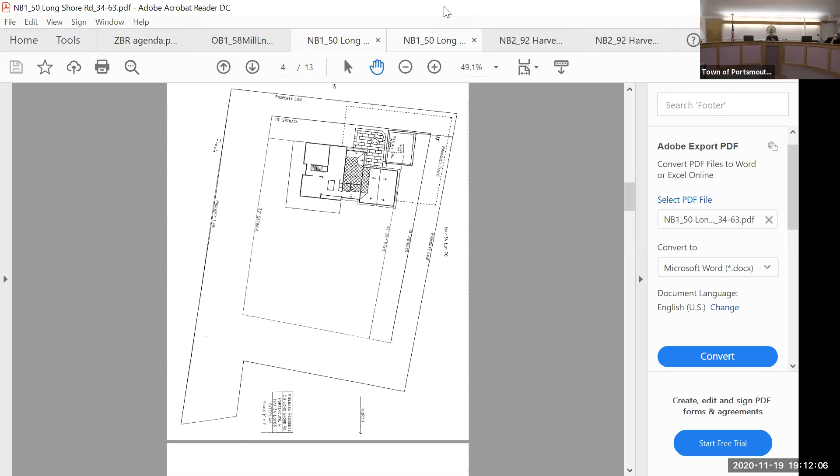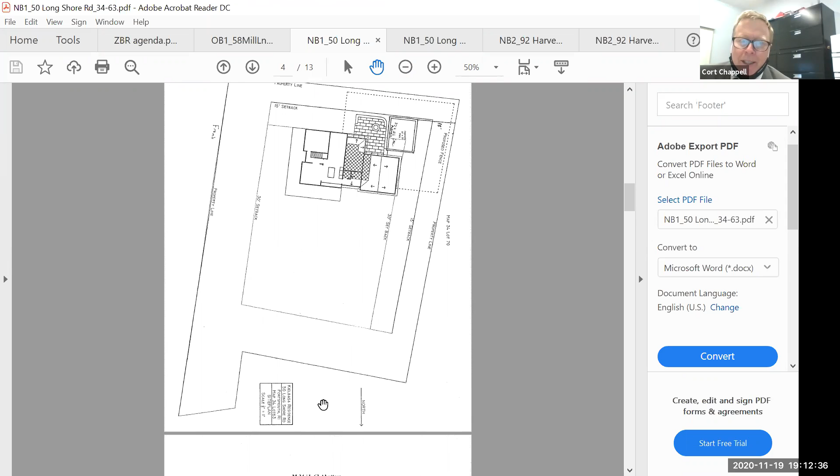I'd like to begin by explaining the picture in front of you. First, north is down in that picture as we speak right now. That line on the north side is Mark Lane. So because that is Mark Lane, there is a 30-foot front yard setback.

On the east side is Longshore Road. Longshore Road is Mr. Kielbasa's address and is also a front yard. So it's one of those situations where we have two front yards.

If you look at the property that Mr. Kielbasa did not build but purchased, you'll see that the house is set back way into what I'll refer to as the southwest corner, and there's a patio and things that are already on the line. What we did was draw the setbacks for you of the double 30 feet. And then, because the front door is on Longshore and the address is Longshore, and we only have one rear yard, I designated the west as a rear yard.

The pool that is being proposed is tucked in as close to the patio as we can get it, and there is 18 feet from the property line where 30 feet is required. That's why we're here tonight asking for a 12-foot rear yard setback.

There are no problems with the front yard setback either to the north or the front-back setback to the west. There's no problem with the side yard setback to the east because the pool maintains the 15-foot setback. It's just that the pool cannot go in the front yards by statute, by ordinance. It's the only place we can put it.

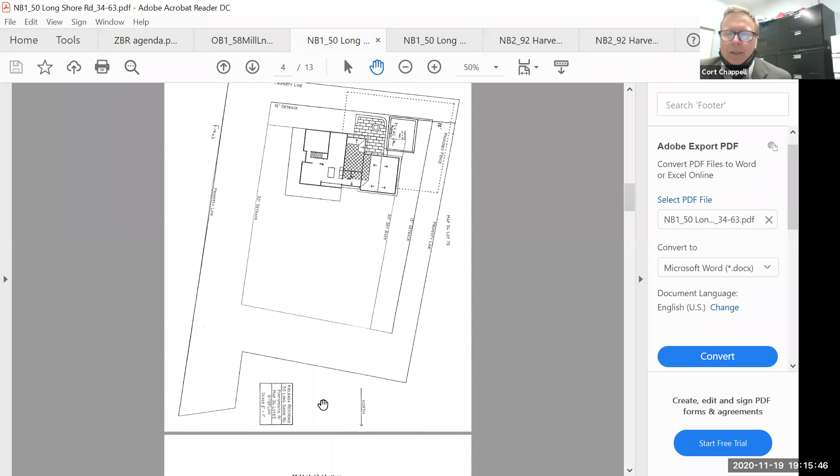I sent to Mike and asked him to put up as an exhibit a letter from Mark and Paula, who own the property immediately to the west. They have reviewed the petition, are in full support, and are in favor of you granting this petition.

If you've had the opportunity to go down there, there is a heavy vegetated line on the west side. So it's fairly easy for Mark and Paula to say they won't see this because of the very mature growth holly trees. And if you've been down there, you'd also notice that the neighbors to the south have a heavy, thick, dense row of pine trees, although it's on their side of the wall. So it's very protected by vegetation on the sides that are affected.

Unless there are any questions of Mr. Kielbasa directly, I think that's the sum and substance of the petition. Thank you. And there are no requests for any variances on the height of fences.

Thank you, Mr. Chappell. I'm looking at a satellite view of it myself right now. One must question why they wanted the house that far back on the property — I think that may be a springy or wet area. If you look at the Google satellite or street view, you'll see the whole thing is kind of elevated, like they put in a system and built the lot up higher. The topography is interesting — it goes uphill from Longshore, and the front yard is flat, but there's a large system out there.

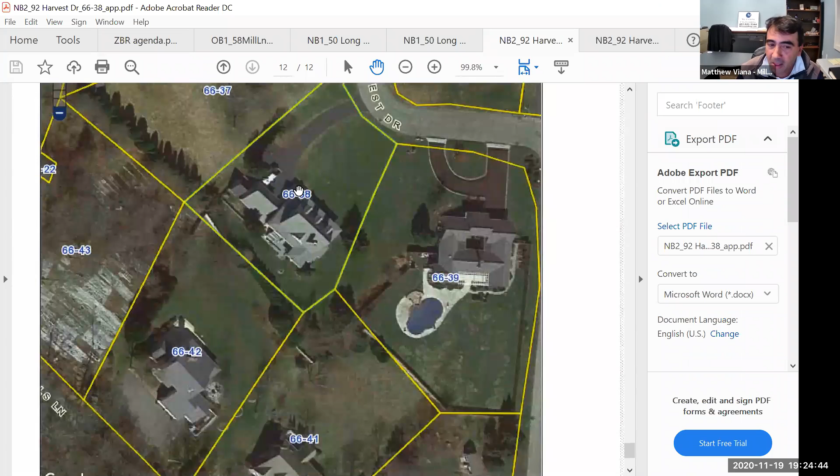This application is very similar to the one you just heard from Mr. Kielbasa and Mr. Chappell. It's an existing home. The Harmons bought it about 3 years ago. They've renovated the inside and the outside. It's their family home, a 3-bedroom, single-family property on Harvest Drive.

This house, similar to the last applicant, was set back toward the rear setback quite a bit, with the septic system located in the front of the property, minimizing the area behind the home where the pool is proposed, requiring the same type of variance. It's simply a rear setback of 15 feet to the pool where 30 feet is required.

And they did not build the property. It's not through any fault of their own. It's the irregular location of the home set so far back to the rear of the property. There's a thick vegetative buffer, as you can see on the plan, about a 10-foot wide evergreen hedge all across the area where the pool is proposed.

There's fencing around the rear of the property. I believe they need to add a little more to close it, but that's certainly something they will do before applying for their building permit.

I can walk through the requirements for the variance process. It's not a result of any prior action of the applicant, as they bought the property this way. It is a unique character of the property where the home is set back so far.

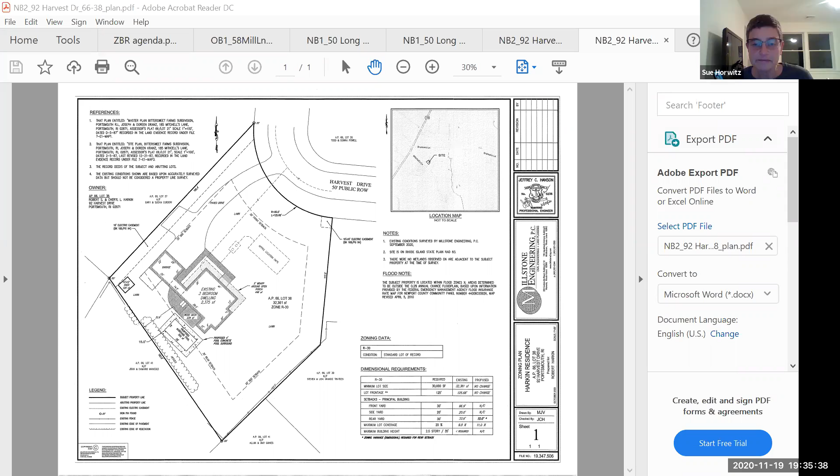Okay, now is Ms. Horwitz on? I'm here, I'm here. Thank you, yay. Sue, good to see you, Sue. How are you? Sorry, I couldn't. That's okay, welcome. Okay, thank you.

So we'll now be hearing the petition of Michael and Karen Mulligan of 58 Mill Lane. Mr. Borden has a conflict on this, so it will be Mr. Furell, Ms. Pavlakis, Ms. Horwitz, Mr. Ladika, and myself hearing this petition. So are the Mulligans on?

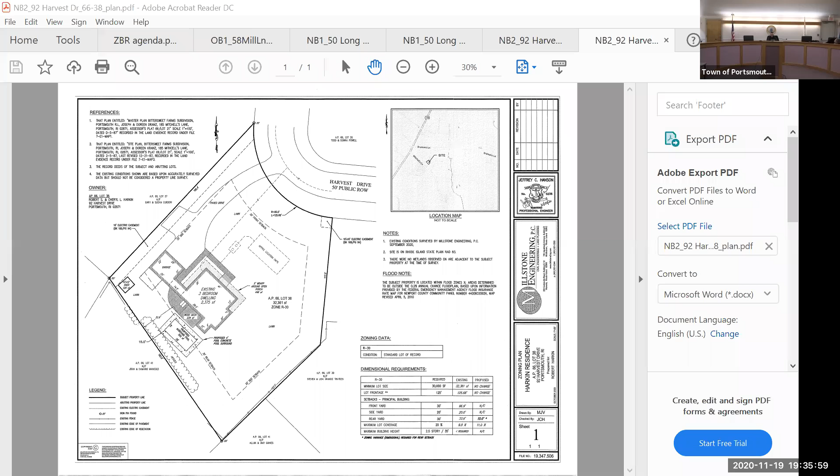You have someone with their hand up now. Does Paul? Put your hand. Is Michael or Karen Mulligan on? Yes, we are. Oh, you are, very good.

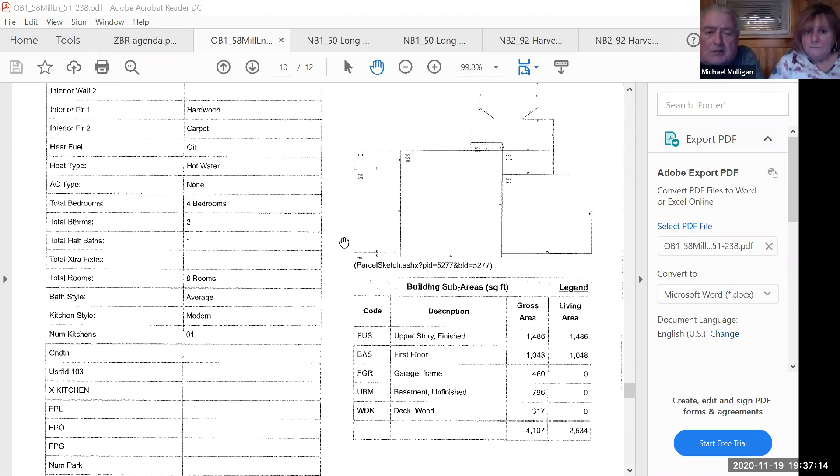Okay, would you like to walk us through why you're here? We had purchased an 8x8 shed that we placed on our property at 58 Mill Lane in a spot we thought was fine, because when our house was originally built, we were on Vieira Road. Sometime later, the town decided they weren't going to approve Vieira Road for use, so we were asked to take Mill Lane by the fire department. Well, we had no choice, so we had to switch to Mill Lane. So basically our frontage is Vieira Road, our side yard happens to be Mill Lane.

Right, and so we placed it on—I'm looking at an aerial shot of this—and your door faces Vieira Road, correct? Correct. Your driveway is off of Vieira Road, correct? Yes. But other than your garage, which points at Mill Lane, you can't access it from Mill Lane. No, we can't. Got it.

So basically, you want, or have put your shed in what you consider the rear of your property, which is that portion of your house behind your front door, correct? No, it's placed basically across from the garage, the opening of the garage, in the side yard, which is Mill Lane. Yes, correct, which the town says is your address. Got it, yes.

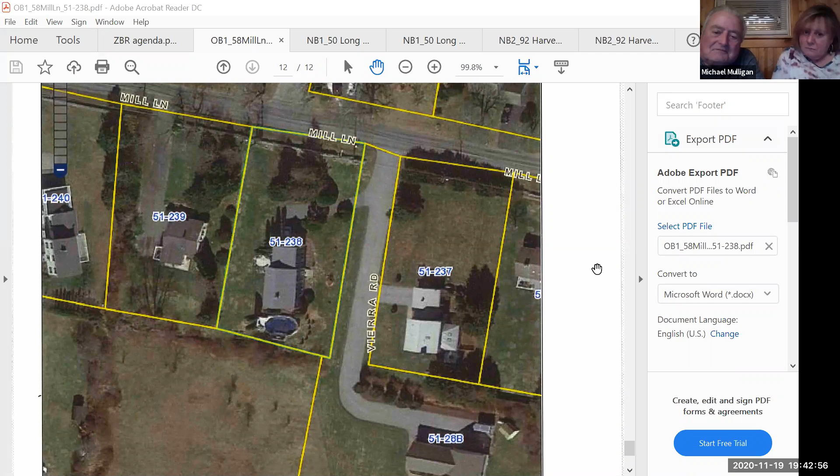There are no letters in the file, but I will ask for any abutters or interested parties who want to speak on this. Do we have anyone, Mike? I don't believe there were any on that I talked to before calling.

So we'll vote now. Michael and Karen Mulligan of 58 Mill Lane, Portsmouth, Rhode Island, before this board, tax assessor's map 51 lot 238, requesting to place their shed in what the town has considered their front yard. The shed meets all other setback requirements, other than the fact that it's being placed in their front yard, although for the record their address was changed by the town - the house was not moved. The door faces Vierra Road, which was their original address.

So, Mr. Furell, do you want to take a shot at this? Yes, sir. Mr. Chairman, I vote to approve the variance allowing the shed to be placed in the applicant's front yard, given the unique nature of the property and the unique designation by the town of their front yard, which is in no way the responsibility of the applicants. I believe it's a reasonable place to put a permitted accessory use, and to deny this would be more than a mere inconvenience. Thank you.

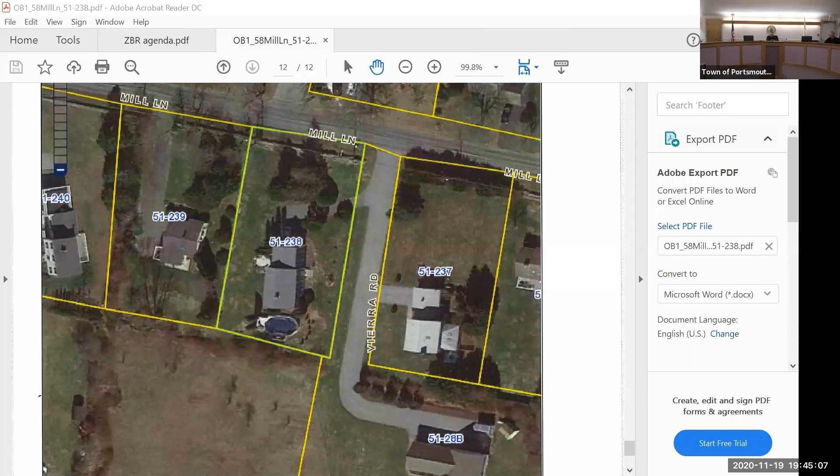Chairman votes to approve for reasons previously stated by Mr. Furell. This certainly was not a hardship created by the applicant. The applicant's hardship was created by the town for no other purpose than to tell them their street was no longer what it was. So again, to deny amounts to more than a mere inconvenience. So it has been approved.

To be honest with you, Mulligans, you should never, in my opinion, have had to come to this board for this. But for the record, it's been approved, and you don't have to worry about it from here on out. Thank you. All right, have a good evening. Have a good Thanksgiving. You too.

Okay, next item on the agenda is by Marianne Dornfield, applicant, and Rick Realty LLC. Now let me get all my paperwork here. They are seeking a dimensional variance under Article 3, Section D2. The parcel, according to their grounds for variance, is a non-conforming parcel that does not front on a public street and currently contains a single-family unit. The variance is being requested to construct a multifamily duplex on the existing non-conforming lot.

So, it is Ms. Dornfield and Rick Realty. She is, and also John McCoy is the attorney who's going to be representing her. All right, so does Mr. McCoy want to start?

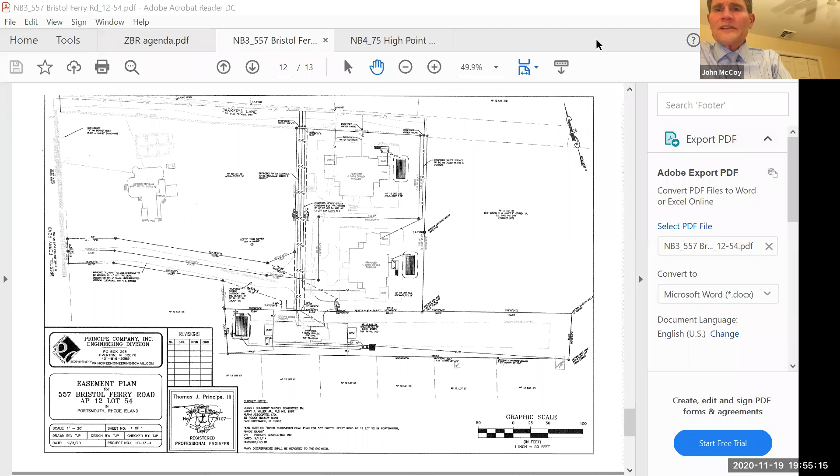Mr. McCoy, before I go around to the other board members for questions, is there anything else you'd like to add? I don't think so, Mr. Chairman, I think I laid it out. I think you summed it up quite well. It is a lot of record, and this is really the least relief necessary to get access to Bristol Ferry Road so this duplex can be constructed. No other variances are being sought, as you correctly noted.

Right, okay, thank you. Mr. Furell, do you have any questions? No, sir, no questions. Okay, Ms. Poplakis, do you have any? No, I do not. Okay, Ms. Horowitz, do you have any? No, I don't. The chairman doesn't have any either.

I will ask, let me see if there's any letters in the file for or against, and I don't see any. However, I do believe there may be a caller. Yeah, I think we have two people with their hands raised.

We'll go with Paul. Paul, if you could unmute yourself and give your name and address, please. Yeah, my name is Paul Ganberger. I'm at 48 Windward Drive, and my property abuts the property in question.

I too subscribe to what Mr. Borden said earlier about his ownership of the property, and when he approached the board a number of years ago to subdivide the property, I expressed some concern at that time, and I have the same concern now about placing this dwelling right where it is.

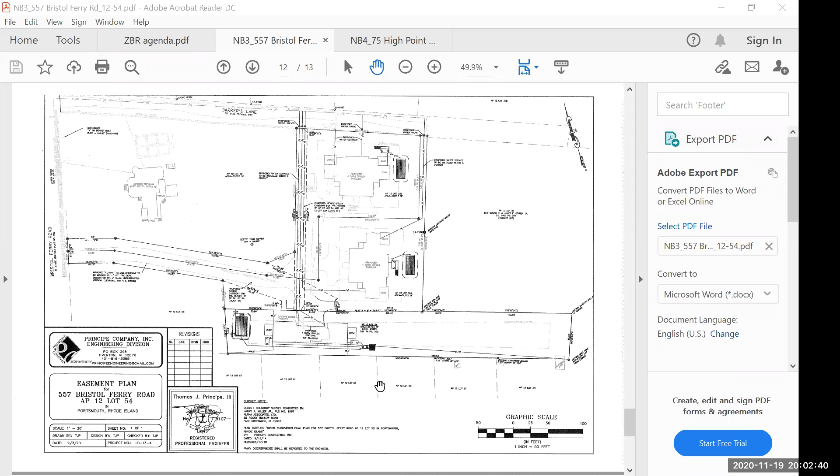Okay, all right, that's it. Thank you. All right, do we have somebody else, Mr. Scholler?

Yes, so right now we're going to have Lisa Rigo—oh actually, sorry, no, this is Dorothy O'Brien. Okay, go ahead, Ms. O'Brien, you on? Hi, I'm having a hard time hearing, but I'm here. Could you give your full name and address for us please? Dorothy O'Brien at 99 Linda Ave. Okay, go ahead, Ms. O'Brien.

My concern is the water drainage, and the fact that that property is higher than my property is, and I've had issues in the past with water drainage and my yard flooding. So with those houses being built, it's a major concern for me with the water drainage and the septic, and that would be coming into my yard basically.

Okay, so you're aware this is not the 2 4-bedroom duplexes—in fact I'm looking at Principe Engineering, and I see Susan P. and James O'Brien, there was a vacant lot that kind of runs that way behind those two. It's not those 2 lots we're talking about, so you do understand that, correct? I do now. I was understanding it was the property that was on Murphy.

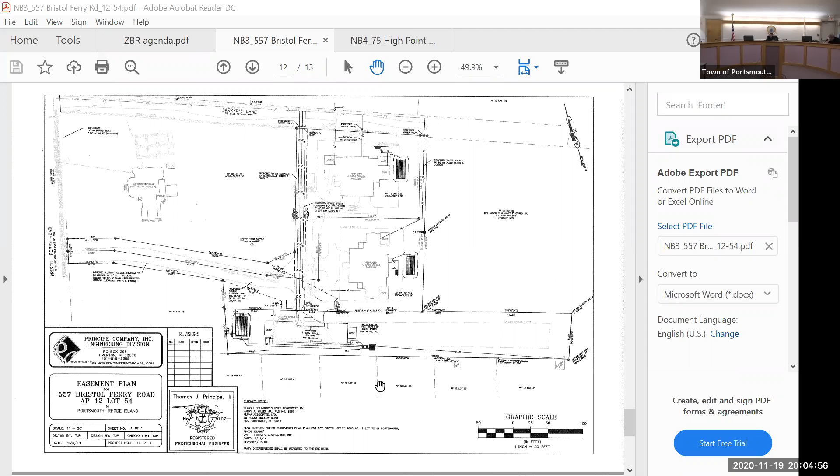It used to be Murphy, the big huge white house there. That was property that abutted 72 Windward, which then connects to my property—my backyard and 72 Windward are touching. And then a portion of the other property you talked about, Susan O'Brien—I think you said James O'Brien. Yes, that's all. Those 2 properties are touching my back property, my backyard.

So then when the water drainage comes down from Bristol Ferry, because it's an incline, the water eventually ends up in my backyard. And what was your address again? 99 Linda. And in the past I've had issues with water, my yard flooding. So my concern is that that'll impact the drainage for the property, for all the property actually, because it's like a domino effect as it comes down.

I see, you're at the very end of that—your house is at the very end of this particular lot. Right. Okay, your main concern is primarily drainage off of that lot. Right. Is there anything else you'd like to add to that? Nope, that's it, I just really worried about that.

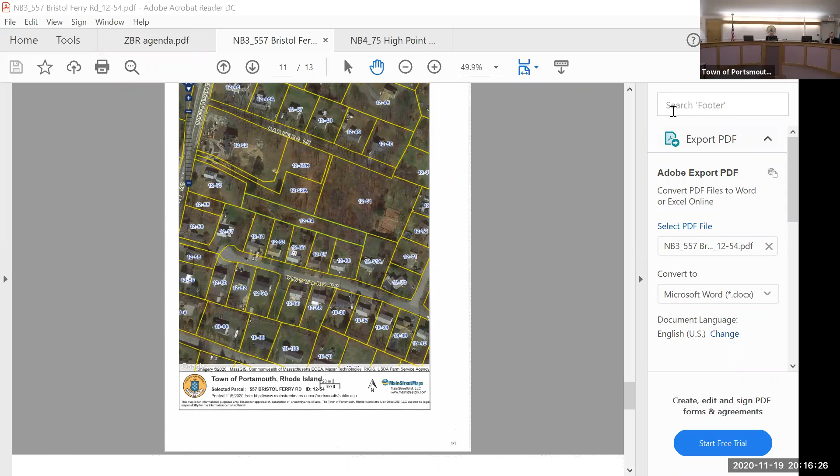All right, good. And I appreciate you all for having us and listening to our sentiments and concerns. I don't need to rehash old wounds, but I agree with my neighbor, Mr. Dornberger at 1265, as well as what Ms. Barboza said. My concerns, and you kind of educated me that it's basically 4 side setbacks as opposed to a front yard and a backyard, but my house abuts half of what the proposed duplex is.

And my concern is that 16-foot setback, as well as when it does rain, even though we're not further down the hill, we take on a little bit of elevated water in our backyard. And to speak to your point, Mr. Chairman, I would be okay with a single family home. The proposed 6-bedroom duplex, when the bigger lots or more traditional lots, I guess, and I know they're not in question, are only 4-bedroom, it feels like we're squeezing something into that just doesn't fit. But that's it, those are my concerns, and again, I echo the rest of the neighbors on those concerns. Thank you for your time.

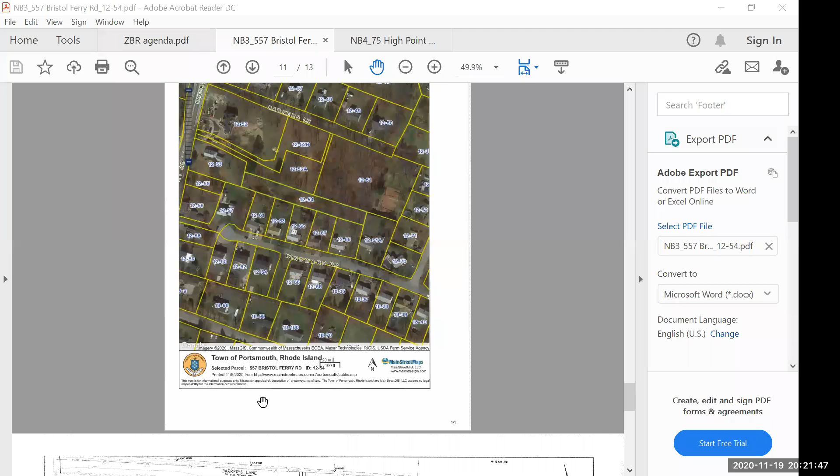Understand, and I appreciate the efforts of the board. But having lived here in this location for over 45 years, in times past when there has been a significant amount of rainfall, the runoff actually comes south and east, from 1252 down into 1263, 65, 67, and 68 for that matter. It just seems to have that type of flow from the property.

Again, we're going to speak with the engineer here very shortly. Thank you, appreciate it.

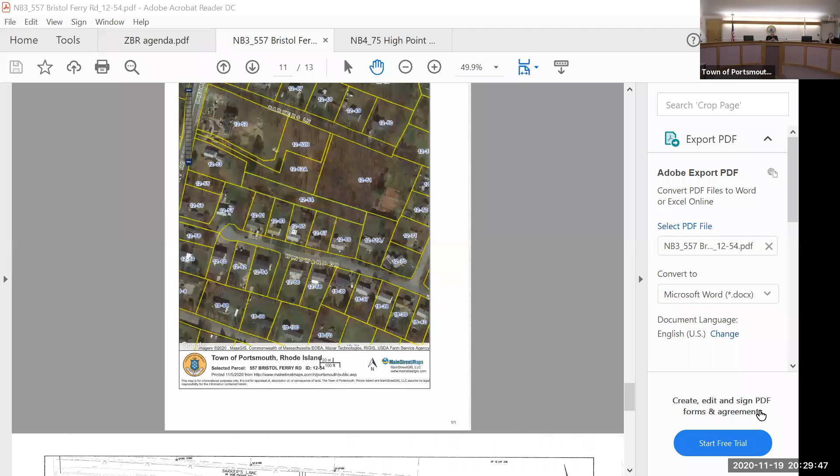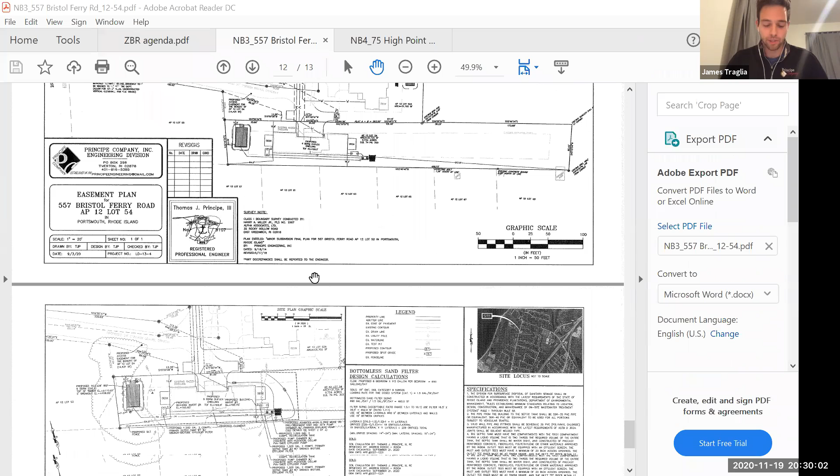Okay, but you do realize that you cannot increase runoff onto a neighboring property. Correct, and I don't see an instance where this does, because if you look at the grades on the plan, they go easterly, toward our property. So the building is located on the west side of the property, which gives the water time to infiltrate as it goes down the east side.

Okay. Any more questions at all? No questions.

Mr. Furell, any questions for the engineer? No, sir, no questions. Ms. Pavlakis, do you have any questions for the engineer? No, I do not. Ms. Horowitz? Yeah, no, I don't. Okay.

I'm not thoroughly convinced, Mr. Traglia, that you've really taken the runoff from the house into consideration. When you say it's going to the east, that's Linda Avenue, and that seems to be one concern of people down in that area regarding runoff. Now, I guess the question is, would the runoff be increased because there was a house there or not?

It is downhill, and Linda Avenue is always going to remain downhill. Is there anything, in your professional opinion, Mr. Traglia, that could be done to help mitigate runoff? I know as it goes easterly, a slight change in elevation, a small retention area that any runoff would go down and be held into. Anything of that particular nature?

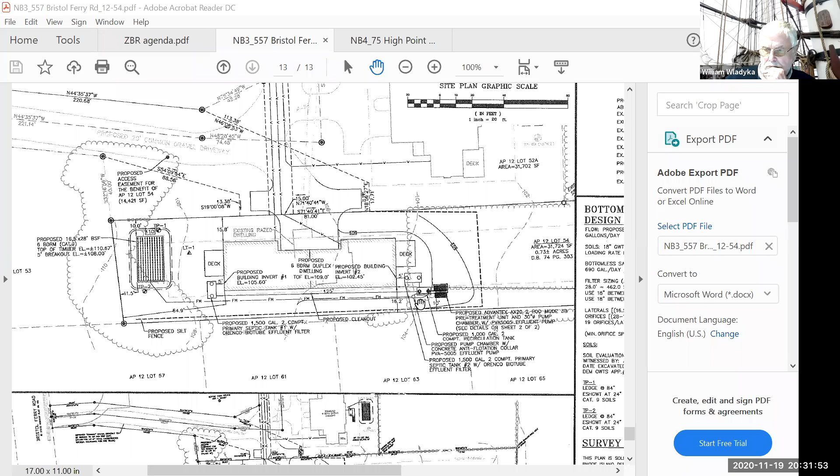There is 300 feet between the side of the building and the easterly property line, so I do think it will have time to infiltrate there. It could be useful to put some sort of swaling or berm there, grading around the dwelling so that the water is directed to that area and not to the abutting properties.

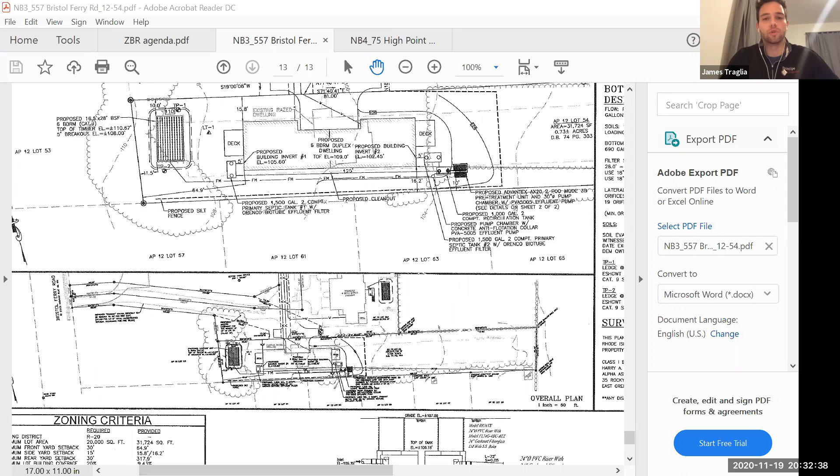Now, when you say not the abutting properties, remember we're not just talking about Windward Drive, we're talking about everything to the east as well, which seems to be more of the concern. Right, but as the water travels down that 300 feet of land, it should have time to infiltrate so that it doesn't affect the abutting properties to the east.

All right, so now I'm going to ask one more question, and I believe I know the answer to it, although I'm not the smartest individual in the world. Given the current conditions we've experienced this past summer, drought conditions for lack of a better term, the ground seems to be relatively hard.

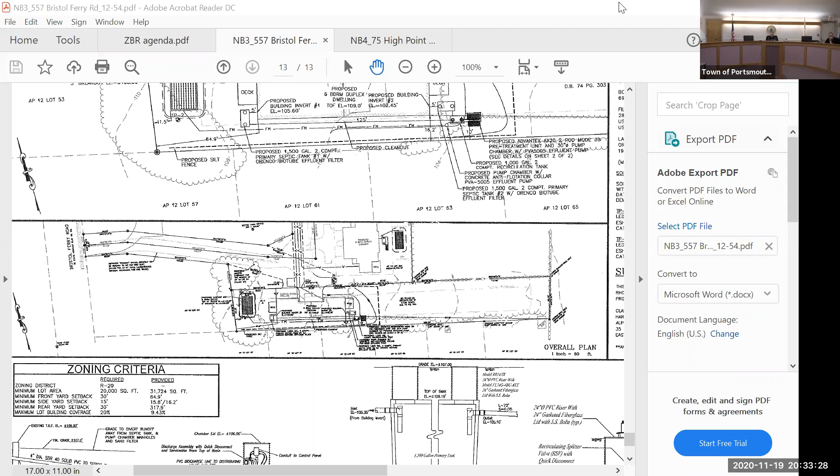So it seems to me that any rain we get right now doesn't absorb but flows right across. I've noticed that at my parents' house, not necessarily mine. Is that normally what happens in conditions like this, because the ground gets so hard that initial rains just run off?

That can happen with properties that don't have vegetation, but this property has pretty substantial vegetation on the east side, so I don't foresee any kind of increased runoff over there. Sometimes when things are just clear cut and it's just dirt, there can be erosion and the water can travel faster.

Mr. Chairman, can I ask a question? Absolutely. I'm having a hard time reading these drawings, but have you included a rain garden to hold the water on the site? There's no rain garden proposed on the site, no.

But would that not be an option that would keep the runoff from the site on the site, and locate a rain garden somewhere which is not unsightly and may prevent the runoff to the neighbor's property?

A rain garden may help the runoff, but I don't see it as a requirement from the zoning ordinance. It may not be a requirement, but if it's going to solve some of the concerns of the neighbors, is it something that is feasible, is my question.

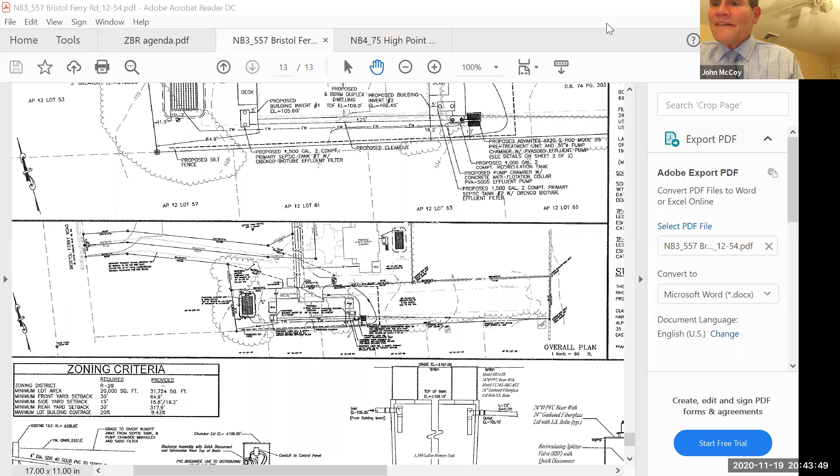Understood, Mr. Chairman. My issue, of course, is I have a hard time now speaking to my client since we're both remote to know what she wants to do. I'd like to address this with the engineer and put this off and re-present it next month after we've looked at this issue. A wise decision, I believe that would be.

Mr. Chairman, I would move that we continue this petition to our December meeting in regards to getting a drainage and runoff plan and potential of a rain garden. Okay, could I have a second on that? Can I say something before?

I'm not saying that the rain garden is the best solution. I'm not a civil engineer. So we agree with that, but we would like something regarding runoff and all that. Right. Yes. Okay, I think we all understand.

Mr. Chairman, may I make a comment or ask a question? Sure. Mr. Traglia, previously, someone stated that per the town ordinances, construction is not allowed to increase runoff. Is that your understanding, sir? Sorry, could you repeat that?

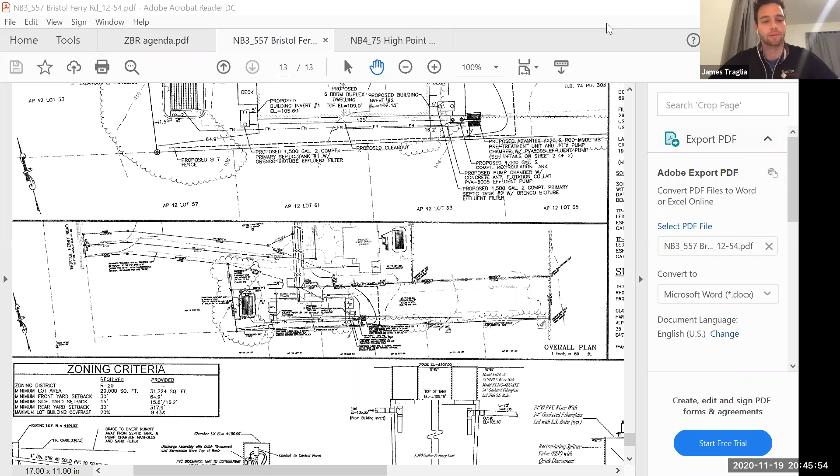So this construction, as you stated a few minutes ago, will increase runoff. Your current plan has that increased runoff being absorbed by the 300 feet or so over to the east. If I understand correctly, that isn't going to be modified or anything. It's going to be the same surface that exists now, that currently doesn't soak up all the water that runs over it. So it seems to me, by definition, the system, the design you have now, cannot absorb increased runoff, since it's not absorbing all the runoff that's coming off the vacant property at present.

Mr. Borden has made a motion to continue so they can come back with us with a plan to mitigate runoff. That's what I was wondering, that I would prefer that the motion not specify a solution like a rain garden, but that it simply states a mitigation such that runoff is not increased.

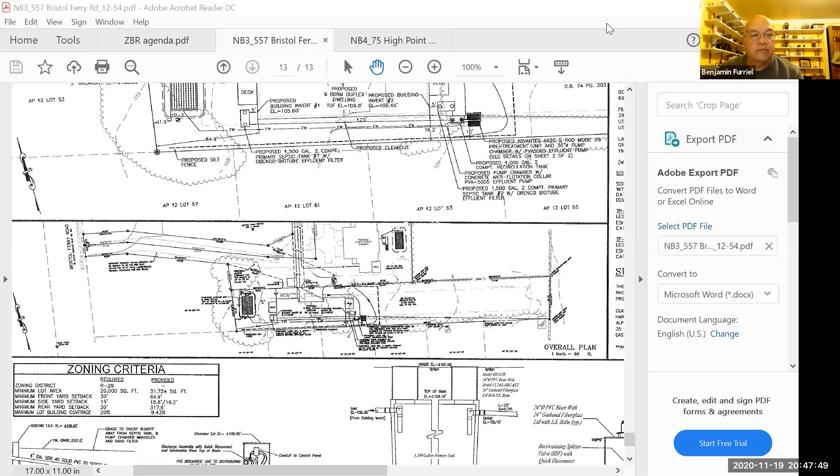Yes, I vote to approve the motion to continue the petition. Mr. Furriel? Ben Furriel votes to approve the motion. Ms. Pavlakis, Kathleen Pavlakis votes to approve to continue the petition. Ms. Horwitz, I vote to approve to continue the petition. Chairman votes to approve to continue the petition to December 17th as well.

So it's been continued to next month. We will see you next month, Mr. Chairman. Thank you. Have a good Thanksgiving. You too. Thank you.

Is Mr. Ladika still with us as well? Yes, I am. Okay, good, because I know Mr. Borden does have to leave the meeting. We've got one petition left. Go ahead, Mr. Borden. I'm gonna try to hang in there. No, that's okay. Just feel nauseous. So I would say go ahead, Mr. Borden. You're gonna try to hang it out? Yeah, I'm gonna try to hang in.

So the last item on the agenda is a petition by Stephen Sider, applicant, SBC Realty, requesting to remove some previously placed conditions on a special use permit.

Mr. Chairman, could we take a 5-minute break? Yeah, we're gonna take a 5-minute break, okay? And actually, if the applicant would raise their hand, they're not listed by their name. Is the applicant for SBC Realty here? Please raise your hand. Is it Stephen Seitzer? Yes. Is Stephen Seitzer on the call? So let's take the recess and come back and hopefully he's here.

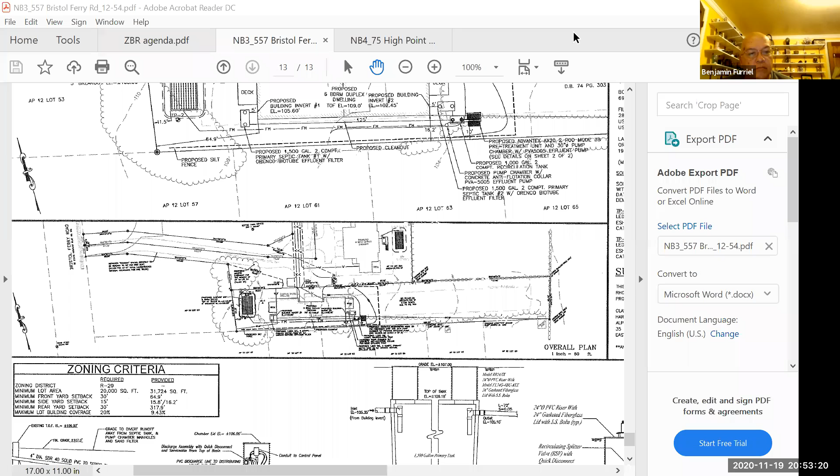So moved by Mr. Ward and Mr. Furriel, could I have a second on it? Mr. Chairman, Ben Furriel seconds. Okay, so Mr. Ward in favor or no? Yes. Mr. Furriel, yes. Pavlakis, yes. Ms. Horwitz, yes. Ladika, yes. Chairman is as well. So, all being said, everyone has voted in favor of continuing the petition on Stephen Sider SBC Realty to our regularly scheduled meeting on December 17th.

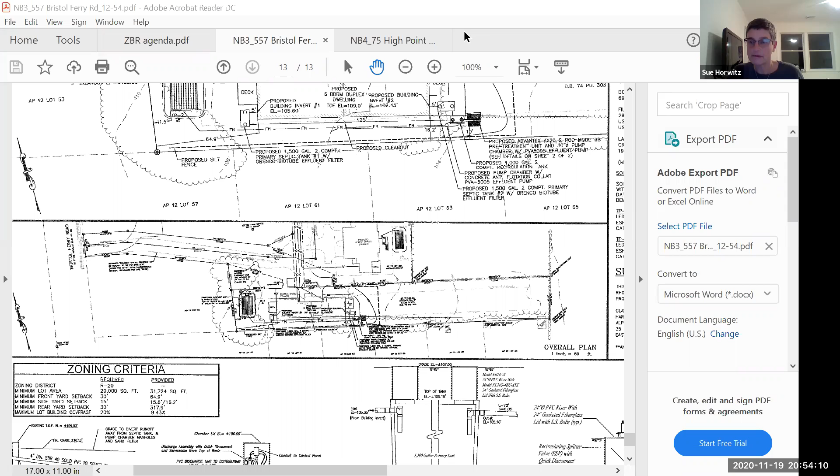Aye. Aye. Kathleen, can you hang for a second? Yep. All right. All right, thank you everyone. Thank you. I apologize. Kathleen, real quick question.

You are up in March. Do you intend to continue on after March? Say that again? What? Your period ends in March of 2021. Oh, yeah. You intend to continue on? Are you gonna reapply for the position? Well, I mean, I do enjoy it. I mean, do you want me to?

If you want to get somebody else, I'll quit. No, I don't care. I'm just asking because the town clerk asked me to ask you. Yeah, I mean, you've got a little bit of time yet. Yeah, okay. I just wanted to put the bug in your ear so you could think about it. I know, yeah. All right, let me think about it. Okay, I'll let you know in a week. Oh, you can let us know next month is fine. Okay, all right, thank you much. Have a happy Thanksgiving. Okay, you too. Bye, guys. Bye-bye.